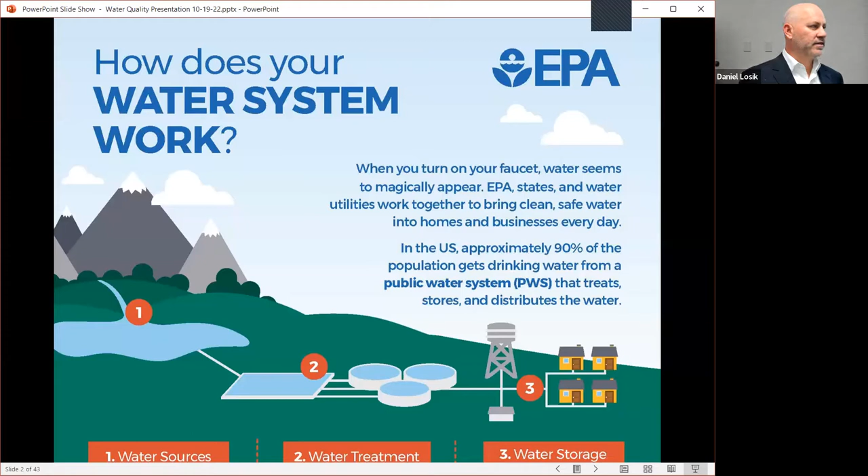This is a slide from the EPA describing water sources, treatment, and storage. Those are basically the three stages of getting water to a home, the final stage being the distribution system. You'll see on the slide that 90% of the population gets drinking water from a public water system. Throughout the country, wells only make up about 10% of the population's water supply.

So the water utility is responsible for providing safe drinking water to the community and making sure it meets the standards of the NJDEP and the EPA. That's what we're tasked with doing. Drinking water treatment isn't really meant to take out tastes or anything like that—it's meant to ensure it's safe to drink.

So the water utility, we have a distribution system of water mains, about 240 miles throughout the town, and 3 storage tanks, 2 of which are elevated, and that provides storage for us during times of drought or high demand, so we can meet the needs, as well as providing fire protection for any event that might happen. So we have to store the water

in these tanks to be able to supply the constant demand for residents. We also provide bulk sales to 3 other municipalities, that being Helmetta, Spotswood, and South River. Some of those are supplemental to those towns.

South River and Spotswood only supplement their supply with us, and Helmetta gets their water strictly from the township of East Brunswick. In 2021, we averaged 5.3 million gallons per day. That was our average for the year. We could peak up to as much as, say, 10 million per day in the summer. Of course, in the winter, it goes a little less.

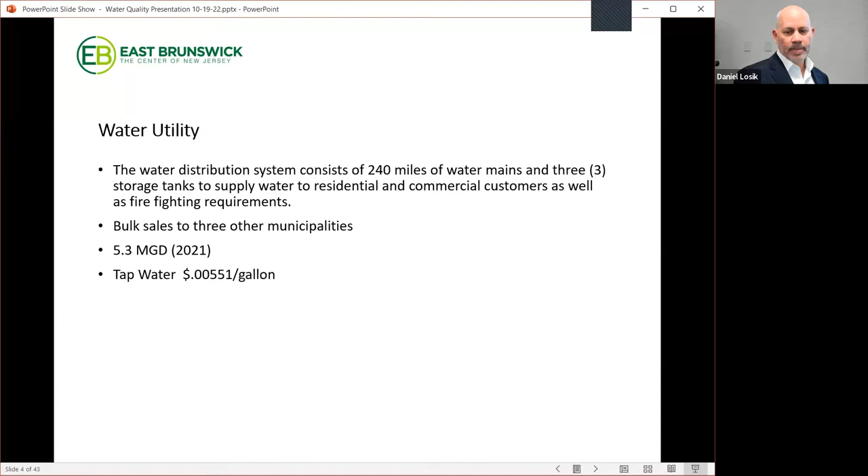All right, if you can see, that's just an overview of our distribution system. Let's see if I can do this. Up here is where we get our water from. Middlesex Water Company supplies the water down Ryders Lane to our pumping station on Tice's Lane, and then it gets distributed throughout the system. This is our Fern Road water tank, elevated tank, Summerhill Road one, which is near the mall, in the mall parking lot, and then our largest one is right behind our pumping station.

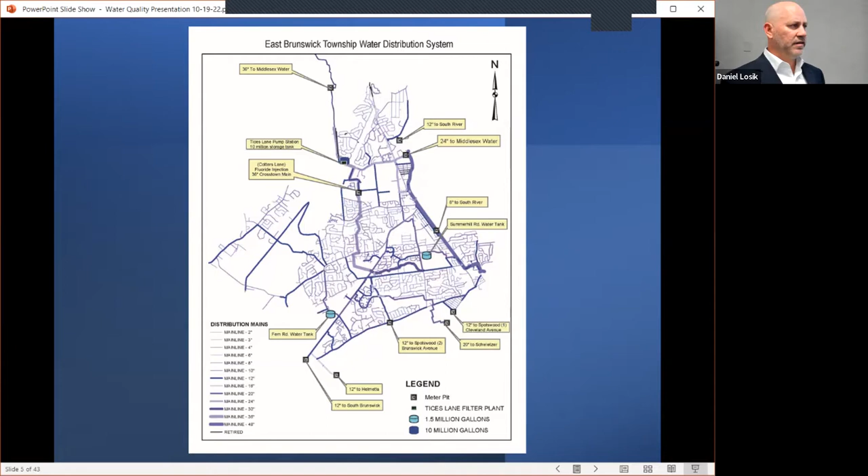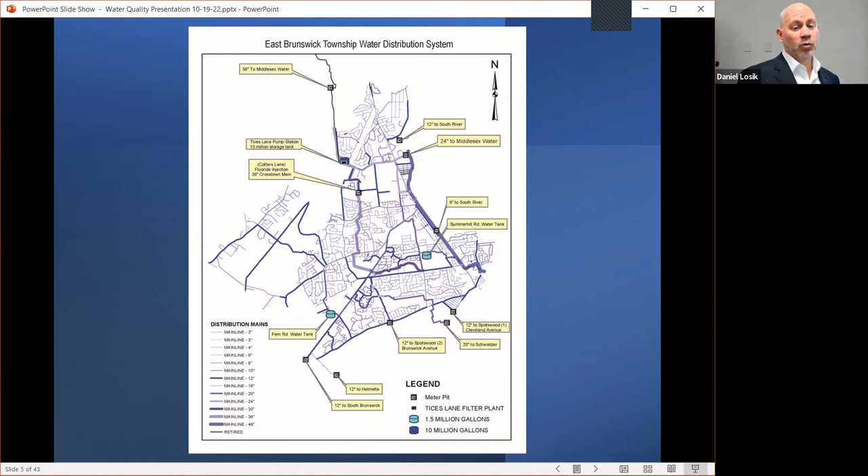This is where we supply water to Helmetta, Spotswood, and South River. And we also have interconnections with other towns in emergency situations where if our supply is compromised, like it was several years ago around the July 4th weekend, we need to get water from other areas. So we have interconnections with South Brunswick, Milltown, South River, Spotswood, and Helmetta.

And those are on the right-hand side there. You'll see our contracts for those bulk customers that we have of what we supply to them.

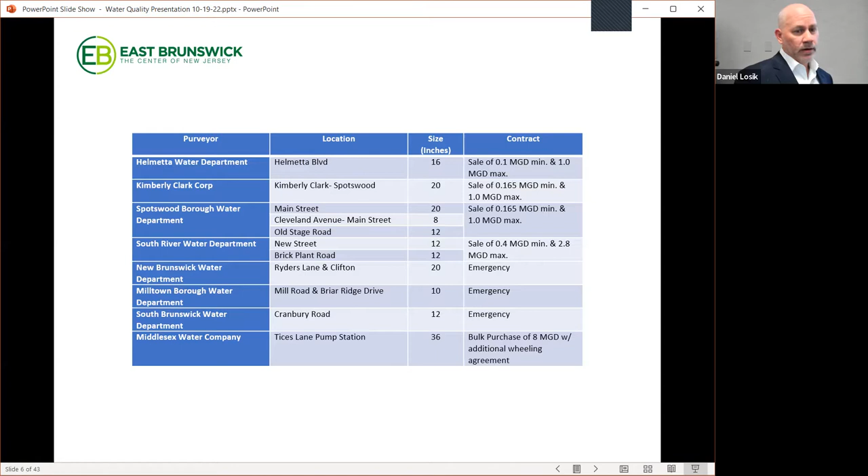Sure. What's the size in inches? What does that mean? Oh, that's the size of the supply line that goes to them. Yeah, that's the size of the main that goes to that particular customer or interconnection. Because I see the different sizes, so I was wondering, does the price we pay as a customer per gallon factor in the size, or would that factor into how much water we could receive or distribute to them? So it's just how much we can get or receive from them, that would just limit that. That'd be a limiting factor.

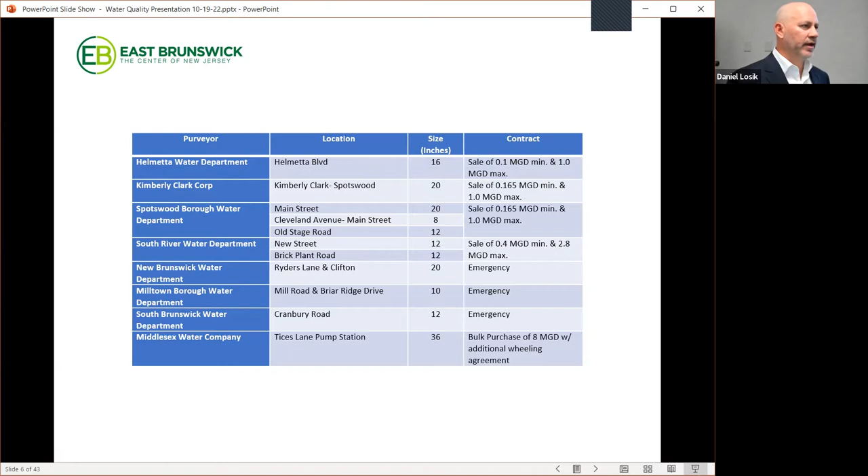Okay, so in 1974 the EPA adopted the Safe Drinking Water Act. It came up with primary standards for drinking water throughout the country, and it listed contaminants that it would like to see addressed. Before this, there were no standards, so we had to ensure that we had safe drinking water for the entire country. That's what the EPA came up with.

And all these came with health-based MCLGs, maximum contaminant level goals. So everything in that primary standard is based on a health standard to make sure it wasn't detrimental to someone's health. With that, they came up with maximum contaminant levels for each of those contaminants, so you can have up to a certain level but cannot exceed that. They also came up with secondary standards, which are voluntary. Those are not health-based; they're more to address taste or odor or things like that that may not affect health.

In 1996, there was an amendment to the Safe Drinking Water Act, which included trying to have source protection for the various sources of water, and we'll cover those in a moment. Along with that, there's something called a CCR report, the Consumer Confidence Report. Every year we submit a report available to the public to look at our testing, how we did, and any violations we may have had, and that is available on the township website at any time.

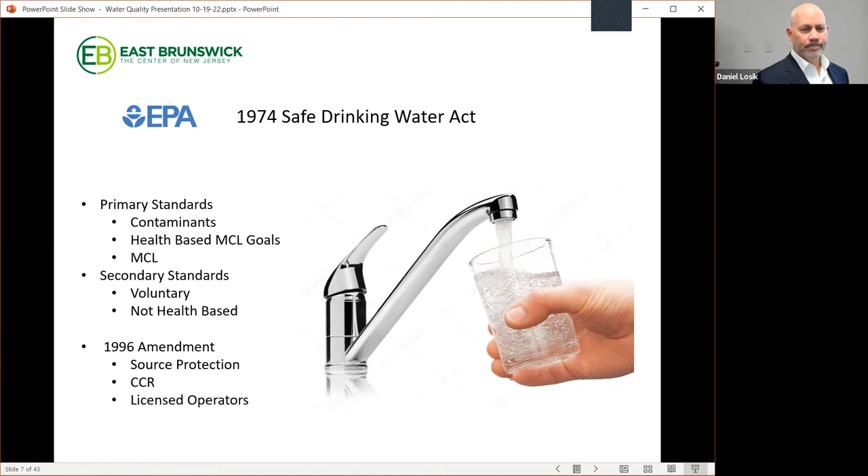What are the water sources? There's really two sources of water: groundwater and surface water. Groundwater would percolate through rock and other geology and settle below the earth, whereas surface water, just like it says, would be a river, lake, stream, things of that nature.

Of New Jersey's supply, 75% is surface water. I know back in the township we used to have a mixed supply of groundwater and surface water. In the early 1980s, from what I understand, the Farrington Aquifer, which we are part of, had saltwater intrusion. So they were limiting the amount of groundwater you could take out of the ground, and at that time the township decided to go to a surface water source, which we'll get into a little bit later.

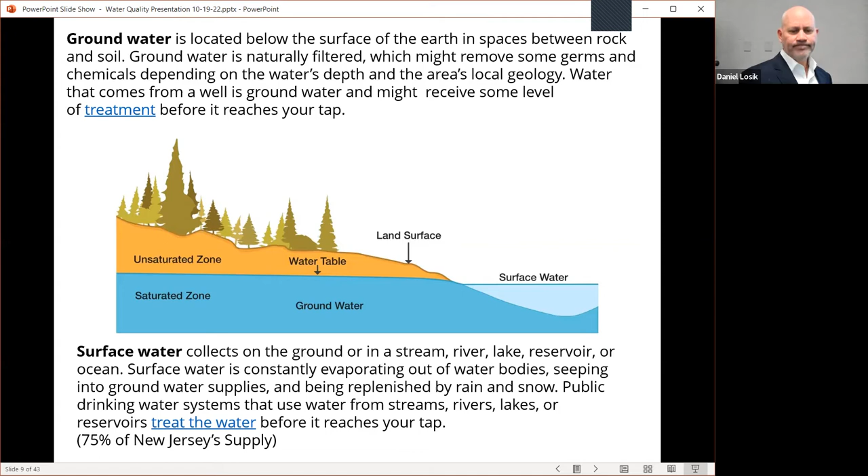So we just have surface water only now, there's no mixed supply anymore. The salination of the groundwater was a result of pumping? The influence of surrounding bodies of water.

So the township, back in about 1985, gets their water from the New Jersey Water Supply Authority, which is a state agency. It was created by the New Jersey Water Supply Management Act in 1981. That act ensured there was a safe, plentiful drinking supply.

So when I talked before about some other states in the western part of the country where their supply is limited, they thought about this a long time ago to go to a sustainable source of water, making sure we had a plentiful supply, especially in central Jersey. That's why it was created, like in California, Utah, all that area of the country.

So they acquire, finance, construct, and operate a large water supply system, which we'll get into in a second. Is that when you say authority, it's like a team, a group of people? Is that what it is? Yeah, the Water Supply Authority is a large group, a team of engineers, executives.

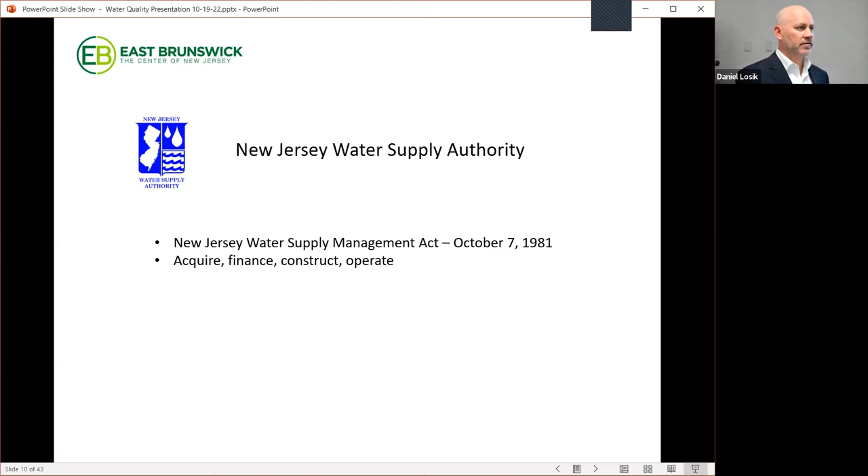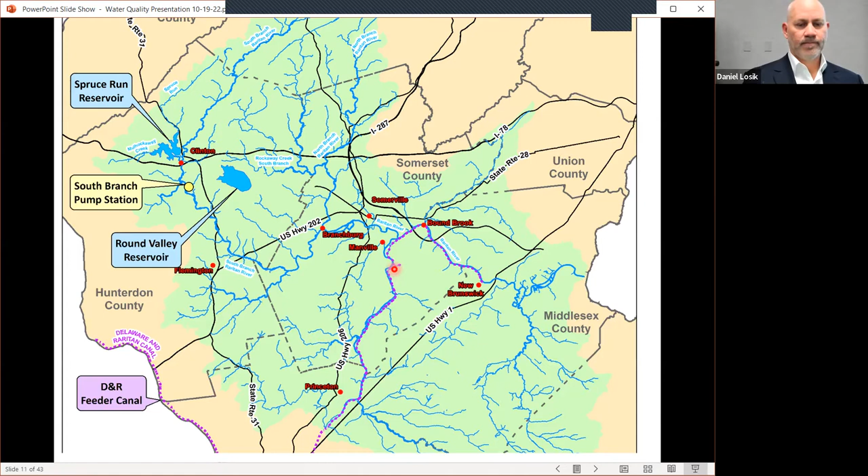They're stuck there in traffic, at 287, that's how I remember it. They make it nice to look at, though.

So the Delaware Raritan Canal was originally a barge canal used to take materials through the Pennsylvania Railroad Company. Afterwards, it was rehabilitated to become a public water supply, and the state took it over. Part of the Water Supply Authority's role is to make recreational paths between the Raritan River and the canal, so people can take advantage of that too.

So part of our commitment or payment to the Water Supply Authority is for recreational purposes as well. They created a recreational component to the Supply Authority, and they also maintain the canal and dredge it from time to time and treat it for different things.

So we get water from both canals? Or do we just get water from the Delaware Raritan Canal? It's one canal, although it has two names. That's also a river. Yes, so it's just the canal itself, the smaller portion, correct.

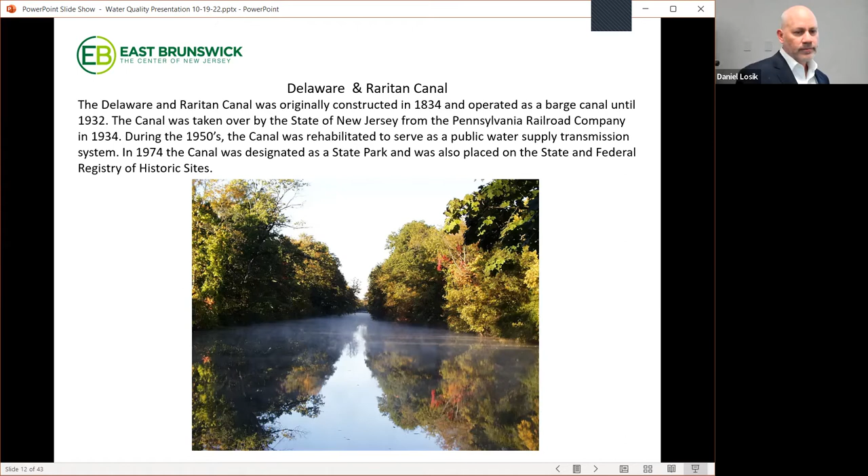So the Spruce Run Reservoir is an on-stream reservoir that holds 11 billion gallons. So we have lots of reserves. In times of drought, they can collect and keep that on hand to provide drinking water for us and for other people that might be taking their drinking water from that canal.

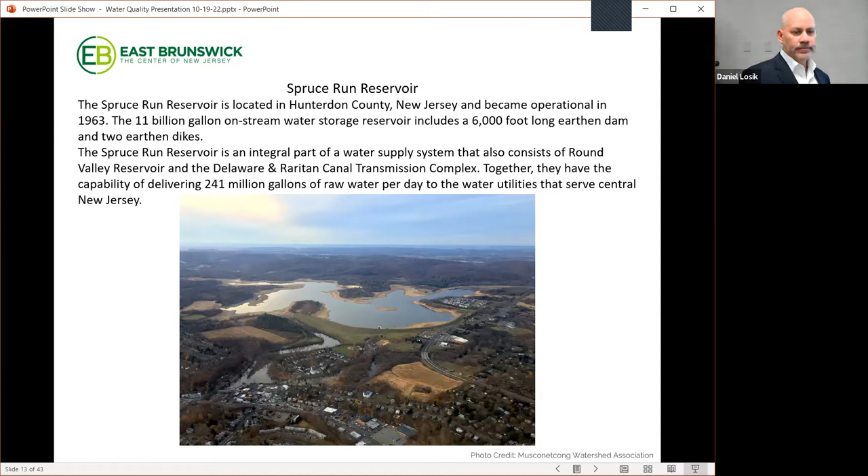And that is also connected into the Round Valley Reservoir. Between the two of them, you can get 241 million gallons of raw water per day to be treated. Here we're going to look at the Round Valley Reservoir, which was basically a geological formation, a horseshoe valley, which they filled in order to hold extra water.

So they took what was natural topography and converted it into something that would hold water and be beneficial to the rest of the state. That reservoir can hold 55 billion gallons of water. Both of these are maintained by the Water Supply Authority.

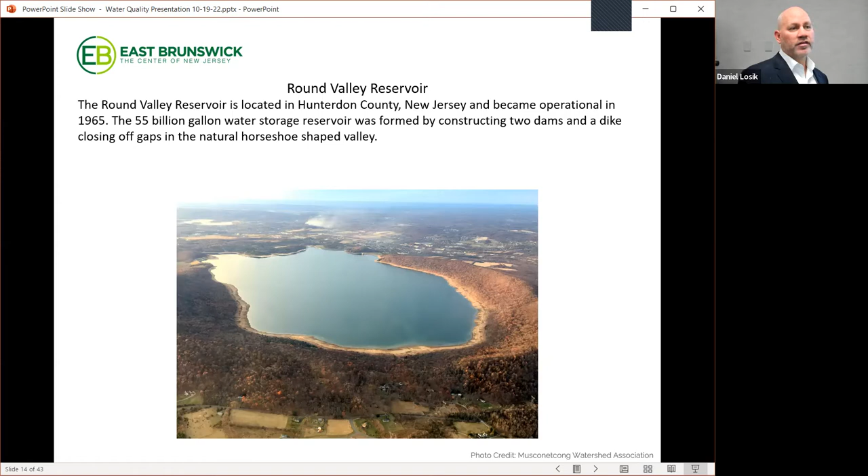And I'd like to share a little video here that they had on this, which I thought was pretty interesting on the reservoirs. Let's take a look.

We're going to be doing a reservoir structures refurbishment and resource preservation project for the Round Valley Reservoir that will enhance the stability and the safety features of the reservoir and ensure safe operations for many more years to come. Well, the reservoir was built in the early 60s. There was a bowl-shaped valley that had 3 gaps in it that needed to be filled to create the full circle that makes up the reservoir.

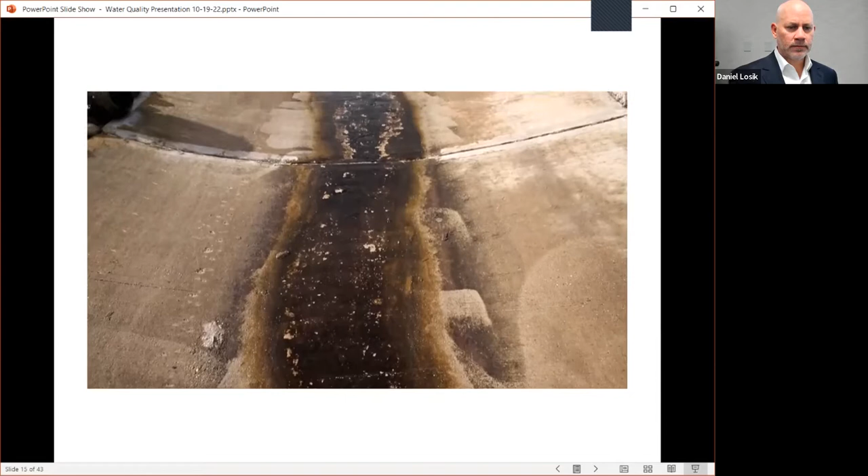We're standing at one of them. This is the Round Valley South Dam. At the bottom of every embankment, they put in drains, because the fact of the matter is these embankments are made of soil and they leak. When the reservoir was filled, they leak. All earthen embankments leak, but the engineers knew this at the time of design and installed features to deal with that leakage. The drains they installed were more permeable materials, such as sand or gravel or a mixture of those, placed strategically to capture the seepage that came through the impermeable core.

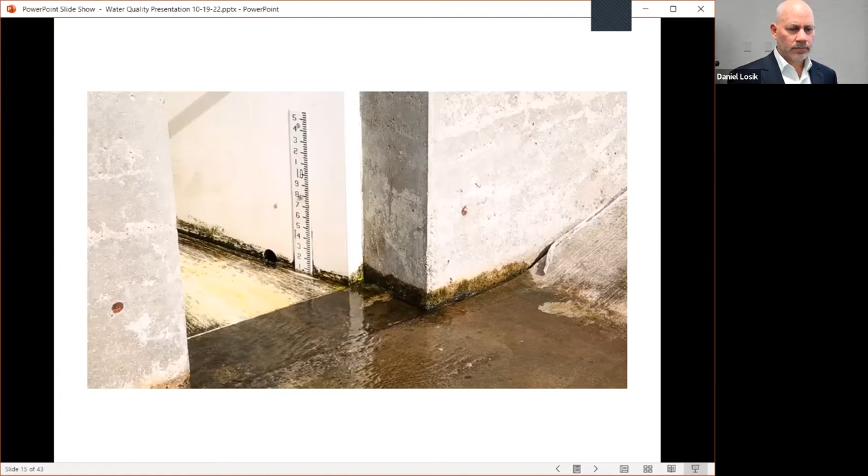The drains transport the water away from the dam in a safe manner. The seepage has been consistent since first fill, but it rises and falls in a predictable manner as the reservoir goes up and down. These seeps have always run clear, meaning it's not carrying the soils that make up the embankment. If they start running dirty or muddy, that would be a concern, because you're actually transporting the structure little by little away from the embankment.

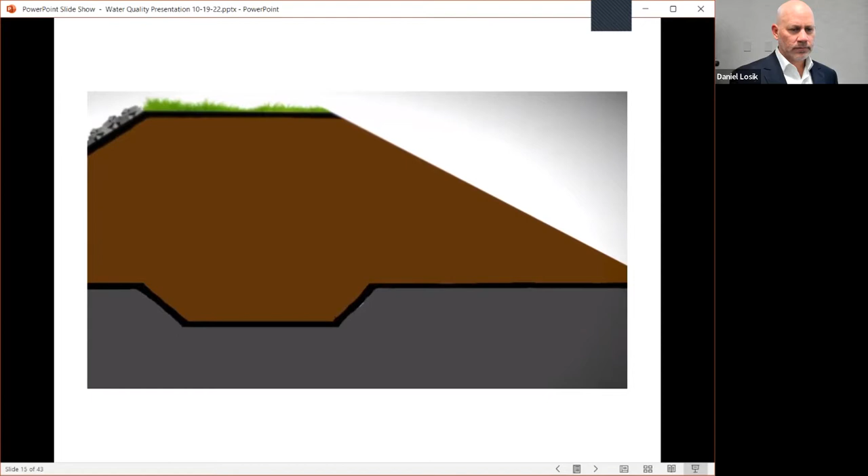The new technologies we have now will be used for the rehabilitation of this embankment. Most importantly, we'll be installing a new filtered drainage system on the embankment. That will entail basically peeling the top layer of the slope, then placing a sand drain. A full layer of sand will be placed over the entire downstream slope. Once the sand drain is placed, the topsoil will be replaced and the embankment will look much the same.

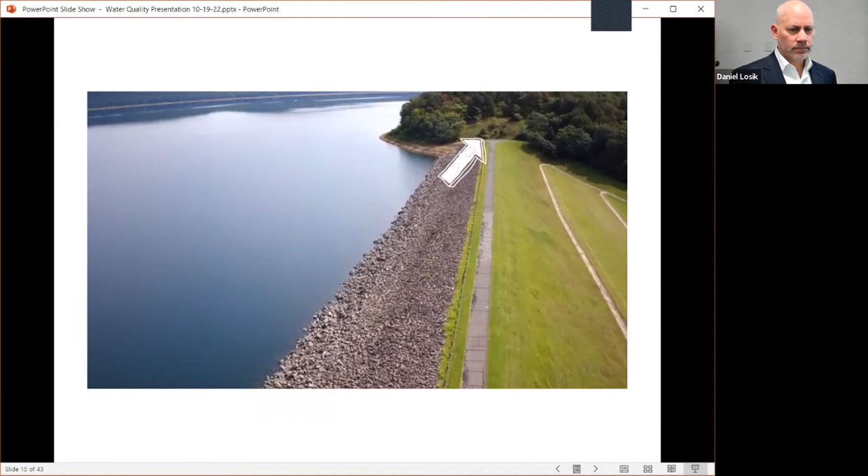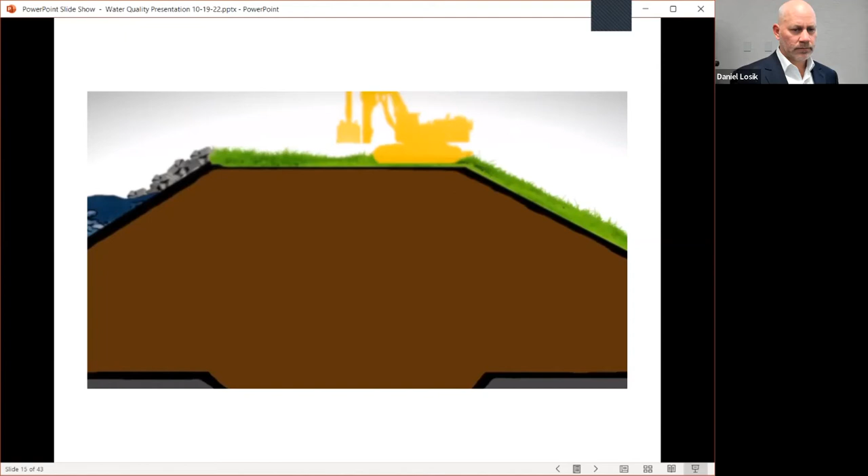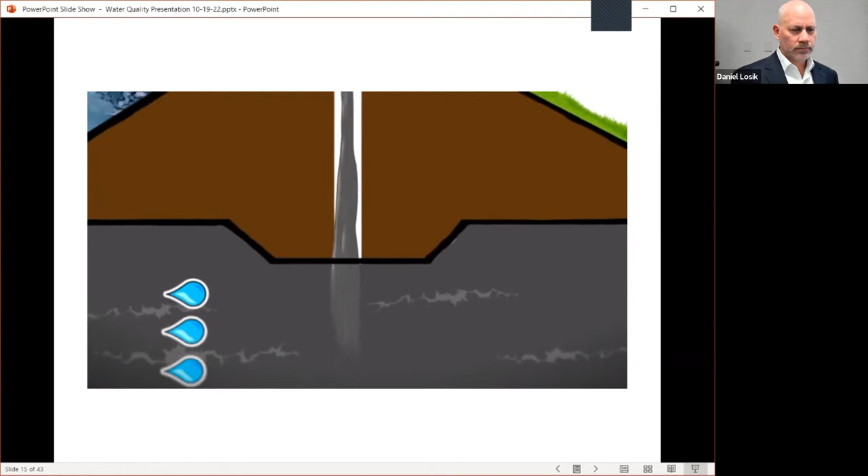Some of the other work we'll be doing involves grouting. The abutment to the embankment is where the existing valley meets the constructed structure. An area right at the abutments is somewhere we might be experiencing some of our seepage. What the public will see will be drill rigs up on the slopes, drilling through the soils and into the bedrock below, at which time they'll be pumping cementitious grout to fill the voids in the bedrock. The operating lifespan of such a structure is usually 50 to 100 years, and the work we're doing now is likely to extend it another 50 to 100 years.

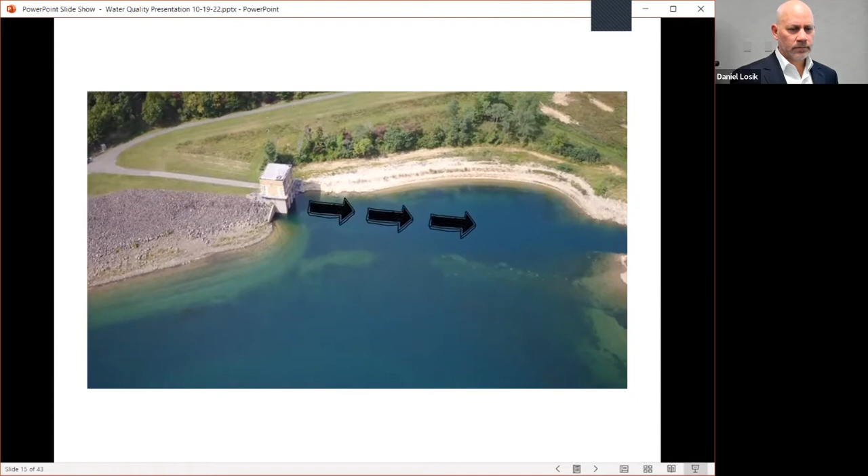Some of the other projects we'll be working on include dredging near the intake to the South Dam Tower. The South Dam Tower is where the pipeline comes into the reservoir. We pump water from our South Branch pumping station. While we're pumping, sediment in the river tends to settle out right there by the tower. When they originally constructed the reservoir, they had to excavate into the rock to create a channel where the water could get to the tower. Over the years, sediment from pumping has settled there directly adjacent to the channel. We'll be dredging that extra sediment out so we can have full use of our tower again.

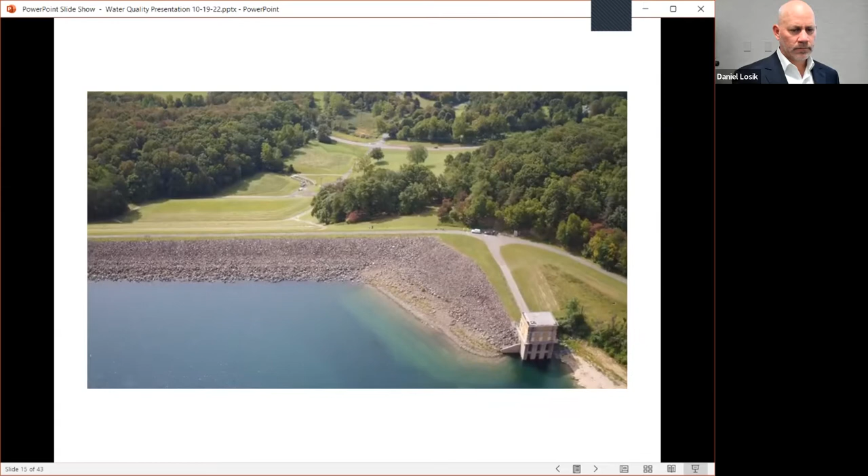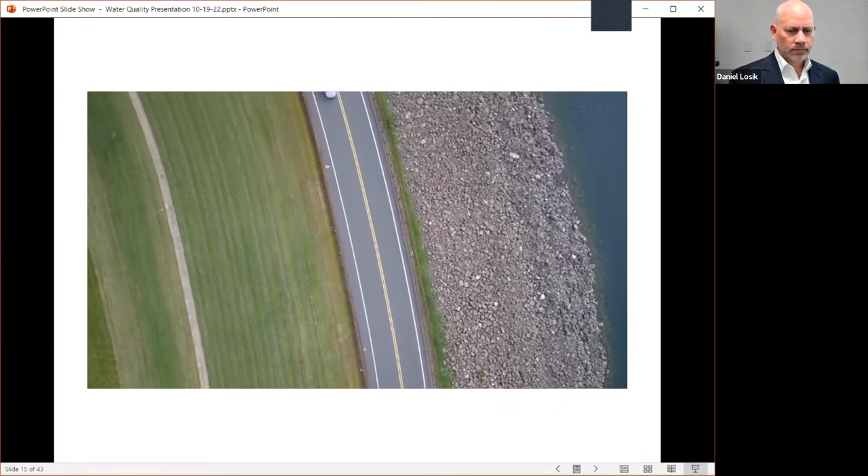There could be local road closures. It's likely that the road over Round Valley Reservoir, County Route 629, could be closed for a period during construction. There could be impacts to other local roads, but again, we're in the planning and design phase, and those impacts are still undetermined at this time.

Access to the boat ramp will be maintained throughout the project, even if the road is closed for parts of the construction. The authority will continue to work with Fish and Wildlife to help them maintain the boat ramp and make it accessible for the different reservoir pool elevations.

We have a great website, www.roundvalleyproject.com, and we'll be keeping the website updated as we have more plans developed for the project, timelines, and there's actually an email list that you can enroll on the website that will give you regular updates right to your inbox. We know that a lot of people love Round Valley and love coming here, and we want them to be able to continue to do that as long as during construction it's safe for everybody involved.

As we saw in the video, there's a significant amount of maintenance that has to be done to a reservoir like that — engineering, monitoring, and things like that — in order to maintain this supply for us. So it's not just an easy thing to provide the water in the quantities that we require.

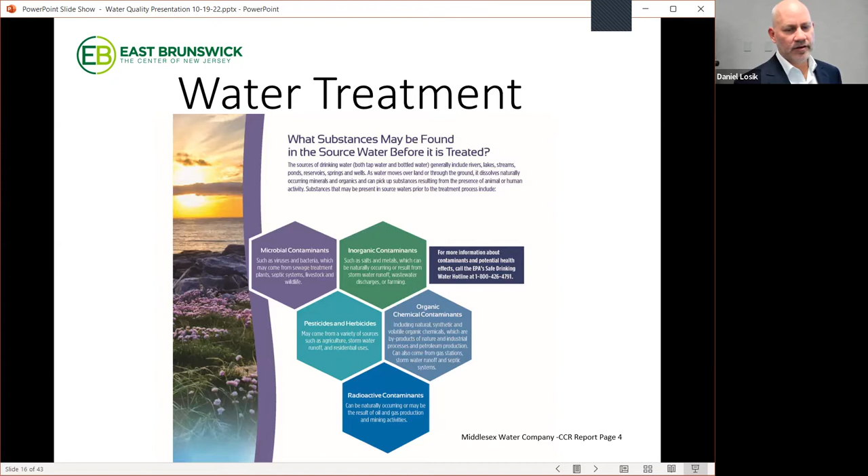So where does our water go from there? The Township does not treat any water ourselves. We have a contract with Middlesex Water Company, which has an intake and then treats the water for us. Part of the treatment, or part of the contaminants they might be treating for, is microbial contaminants, inorganics, potentially pesticides, herbicides, organic chemicals, or radioactive contaminants. Those are the potential substances that may be found in our source water.

So this is the plant that our water gets fed to, or gets pumped to — the Carl J. Olsen Water Treatment Plant at the Middlesex Water Company. And that construction you see there in the picture, I'll get into in a moment. That was a $50 million improvement to the treatment system that they installed recently.

When we got the contract with the Water Supply Authority, we worked it out where they would treat it for us, so they only provide treatment for us. So we have some benefits for buying in bulk. We buy our water in bulk from the Supply Authority and then have it treated by Middlesex Water. So there's some benefits to that, and that's how we purchase and treat our water.

So when you say we purchase, that goes out of the municipal budget, right? The water utility, yes. So we buy the bulk — they call it raw water — from the Supply Authority, and then we buy the finished water from Middlesex, which is we just pay for the treatment of it.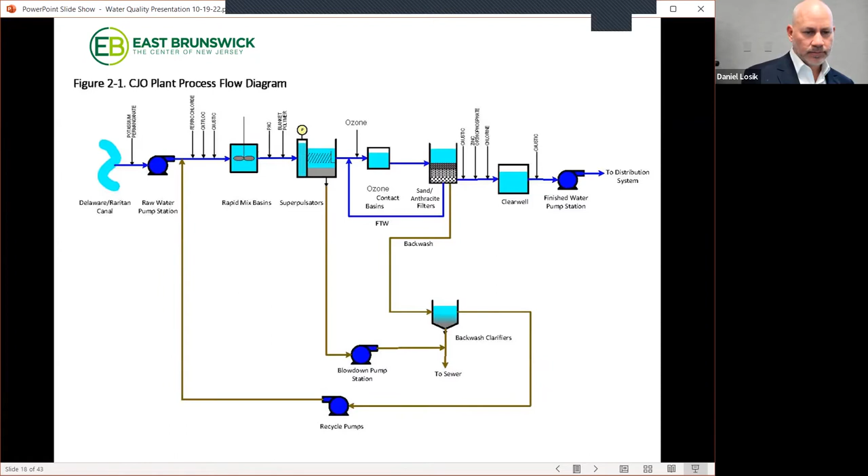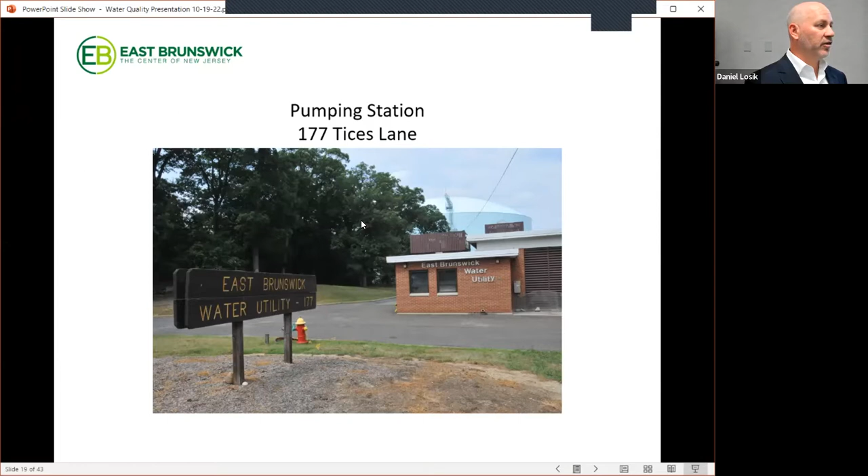So at the pumping station, we have a water system operator, so that's a 24/7, 365 operation. We have people there all the time to monitor our system, and the operators are state approved to sample water. They use our certified equipment, and we make sure that's calibrated on the frequencies that are recommended, and within the limits of the manufacturer specifications for tolerances to measure what we're actually measuring.

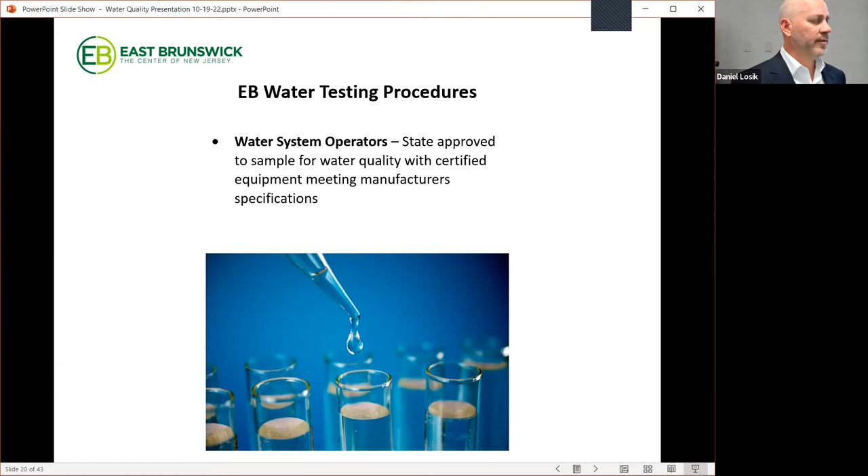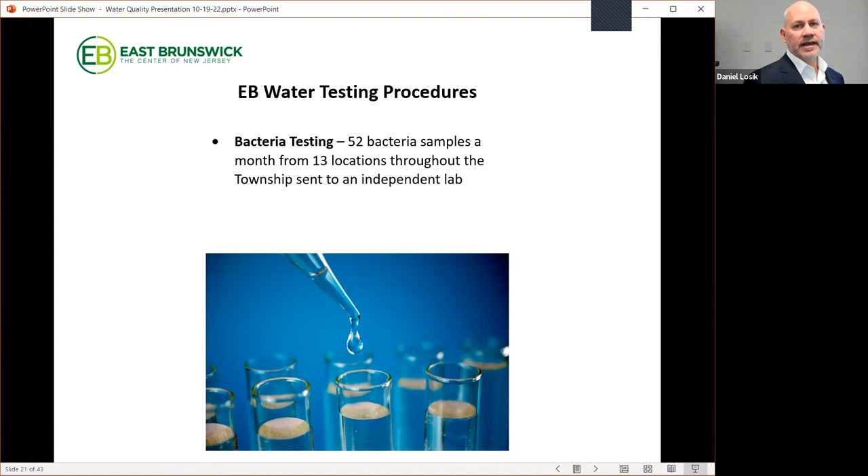So we perform bacteria samples every week. We do 13 bacteria samples in the system, and I'll show you in a minute where those are, for a total of 52 that we must submit to DEP. Those are then sent to an independent lab. We don't know the results of the test, so there's no way we can change anything. We take the samples, and they come and collect them.

So it might be a little hard to see, but this is the sites we take our samples at. You'll see a bunch of these ones, Rutgers Gardens, on the extremities of the system. That's where you're going to have the most dilution of any kind of chlorine, or potential of water that's been in the system for a long time, since it has to work its way to the outside. It's kind of like your fingers and your toes, and our pumping station would be your heart. So these are the extremities where you're most likely to have any kind of issues in terms of water quality, because of the time it's been sitting in the system.

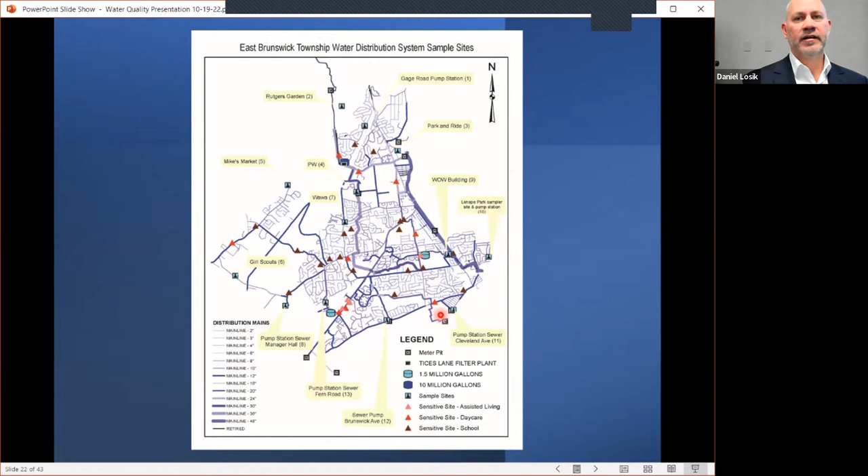If there were an issue with bacteria found by the state, would they notify you? Yes, we would get notified, and then you'd most likely get a boil water alert, which hopefully you haven't heard of before. We would have to issue that. The state would immediately notify us of our deficiencies. We'd use whatever we had to for that, we use everything at our disposal to get that out.

We have water quality parameters we have to adhere to as well. There's 10 sites per quarter we have to test for certain things, like the orthophosphate we discussed a little bit earlier, and alkalinity and pH. So those are part of our quality parameters that we have to do.

There's a question on the chat asking how the township is preparing the contractor to treat our drinking water for emerging contaminants such as PFAS and PFOA. Yeah, we'll get to that. And then I see another question about the aquifer under Edgeboro Landfill. I do not know about that. I don't think any towns use that. We certainly do not.

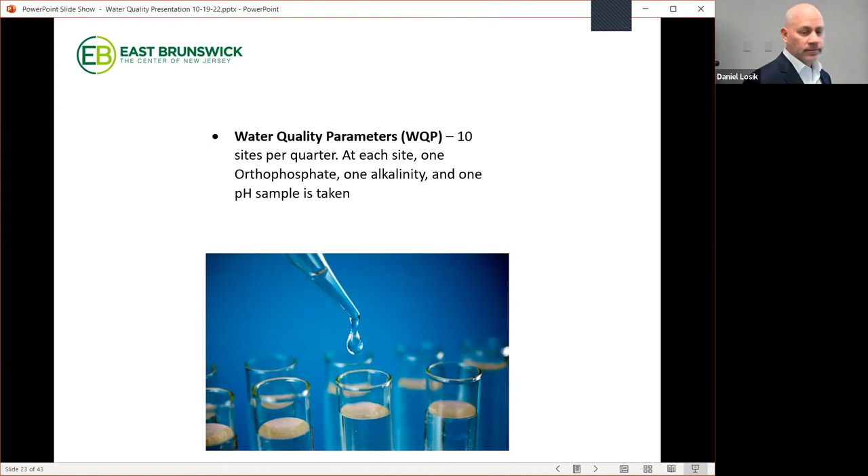At the entry point to the distribution system, we're required to biweekly take an orthophosphate and a pH sample there, and that is taken by the lab. Our certified lab comes and takes those samples at our pumping station at the entry point to our distribution system.

Is our water supply being monitored as others are for signs of certain viruses like COVID and polio? We've been hearing stories that these viruses have been found, but that's actually more in sewage, wastewater effluent. That has nothing to do with drinking water, no.

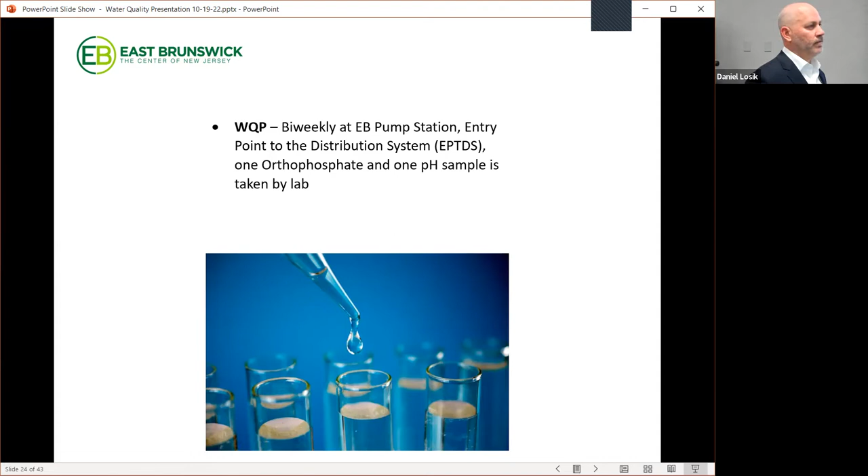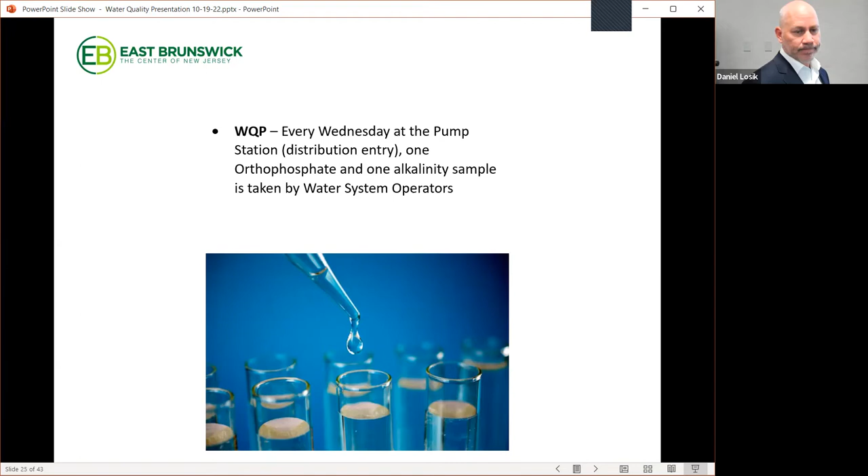Every Wednesday, we take our own sample of orthophosphate and alkalinity ourselves to double check what is taken by the lab, so we can keep up on everything. Daily, we test chlorine, fluoride, pH, and water temperature 3 times a day. Those numbers are constant, we're doing those constantly.

Arsenic? That would probably be from Middlesex Water on their tests, or I'd have to check on what the tests are from the lab. I don't know that offhand, but I can get that answer for you. I apologize for not having the answer right now.

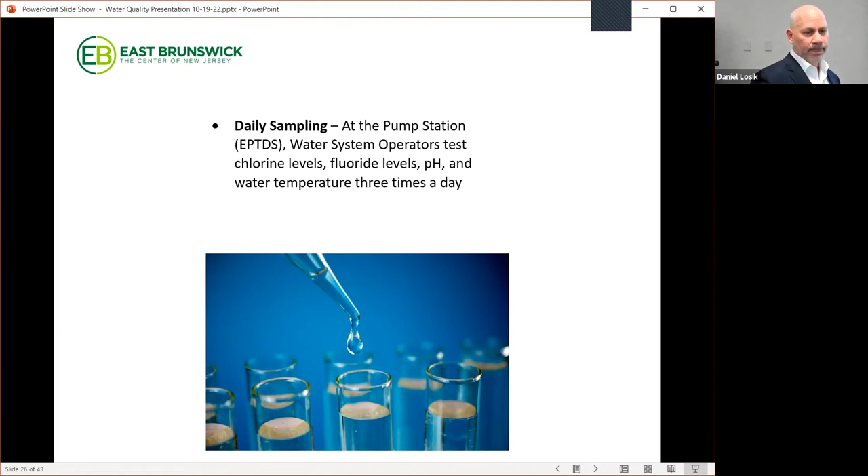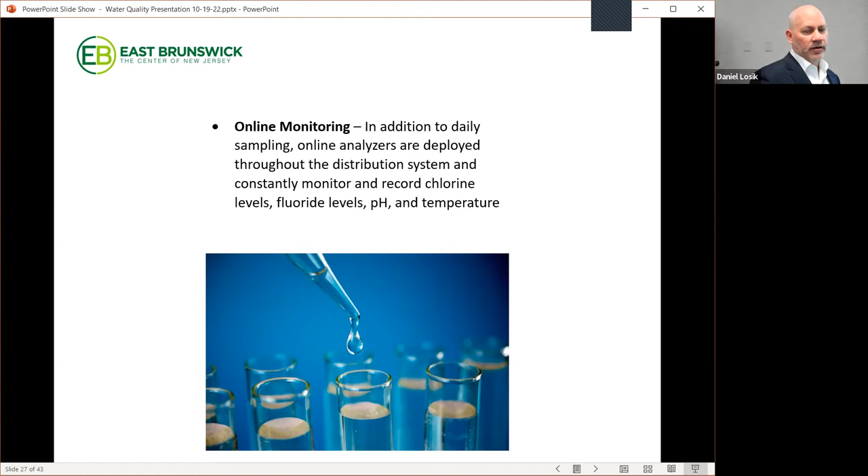We also monitor using analyzers that we have for chlorine residual, how much chlorine is left in the system at certain points of the distribution system at the extremities, to make sure it's safe and at a certain level, along with our fluoride, pH, and temperature.

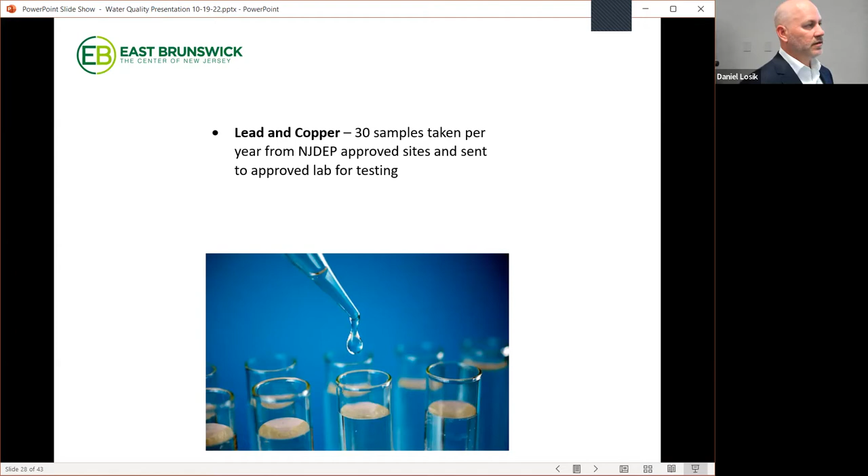Lead and copper, we have 30 samples taken per year at approved sites that we have to send into DEP to get tested. And then iron and manganese is tested once per year by our lab as well.

These are the disinfection byproducts that Middlesex is trying to eliminate or reduce by having the ozone system. Trihalomethanes are some of the byproducts of chlorine generation if it's too much of a concentration, and we're tested quarterly for those at 4 locations throughout their system, as well as HAA5s.

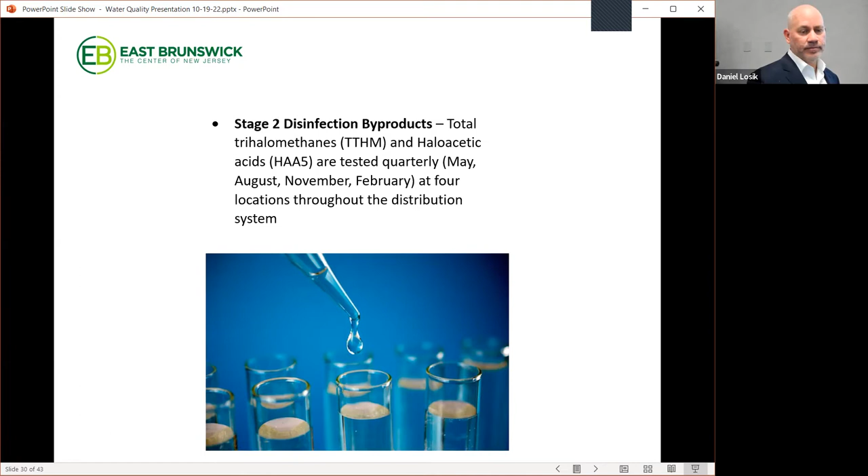This was one of the questions we had online about some emerging contaminants or emerging issues that are happening. We're tested 1 time per year at a designated location for that. New Jersey was the first state to set a standard for these contaminants. They're really derived from firefighting foam, and from what I understand, also a breakdown of Teflon. So these things are getting into groundwater and surface water, becoming more of an issue at certain concentrations.

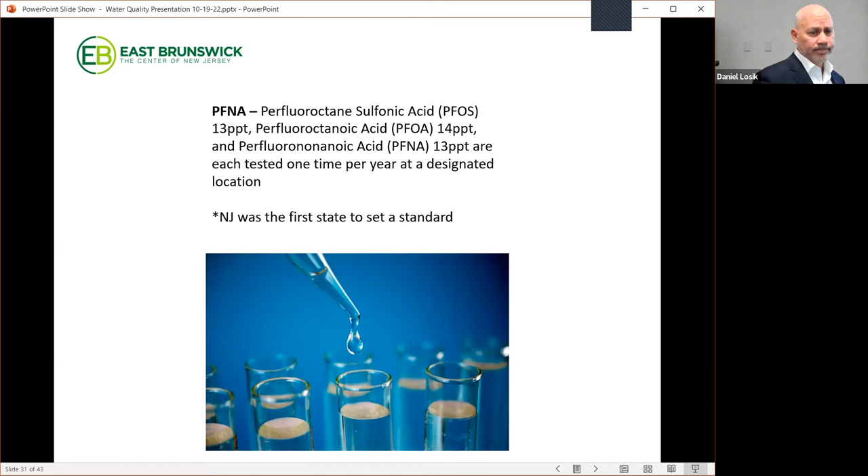Every so often we have UCMRs, which are unregulated contaminants, which we monitor for through EPA. The next phase, the 5th phase of that, will be taking place next year in January.

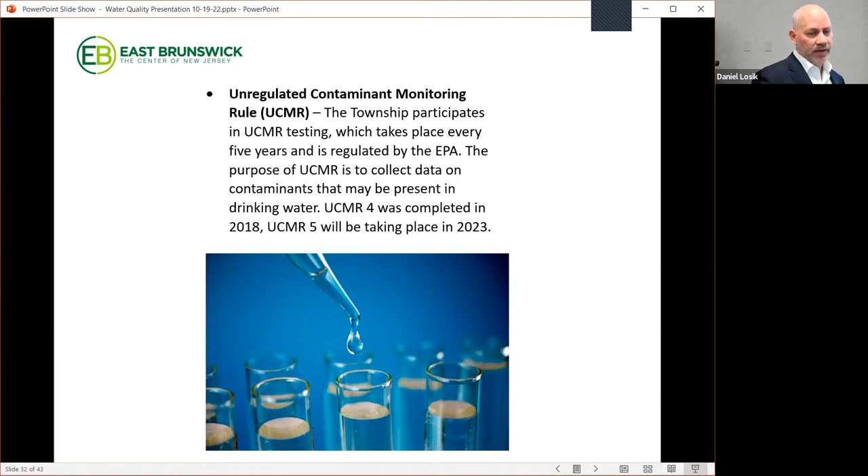The township had decided back, I guess in the 60s - I wasn't around then - that we would fluoridate the water. We have to maintain a level of 0.7 parts per million for fluoride, and that helps prevent tooth decay and strengthen enamel, basically for younger children. We're one of the few towns that do it, not everyone does, but that's the only thing we technically treat for - it's the only thing we add to the water ourselves.

Kevin might know, a previous mayor had ended the fluoride treatment. No, it's been discussed, but it has not been taken out of the water. Yes, it's been continuous since, from what I understand, the 60s. What are people's concerns with fluoride?

I don't want to speak for anyone, but some of the comments I remember are that some people have differences of opinions. There are differences of opinions from different organizations, academia, things like that. It's really an opinion type thing, which I have none of.

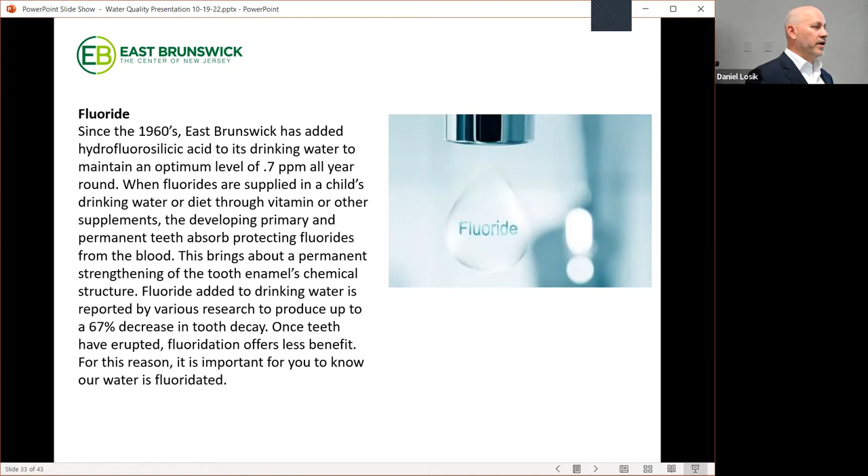There's something passed by the NJDEP called the Water Quality Accountability Act, which made some requirements for water systems. We have to replace our water mains in a certain cycle, every 150 years. As far as I know, we don't have any mains that old yet.

We also have to provide cybersecurity for our SCADA system, which monitors our tank levels, our pumps, and chlorine monitors, to prevent any kind of breaches where someone could take over anything. We were also required to exercise valves to make sure they work, so we can shut off the water at different locations to control it.

At certain intervals, we have to make sure those valves work. And then we are required to test every hydrant at least once a year. That's good practice too, in case of a fire, to make sure there's adequate fire protection for residents and commercial entities.

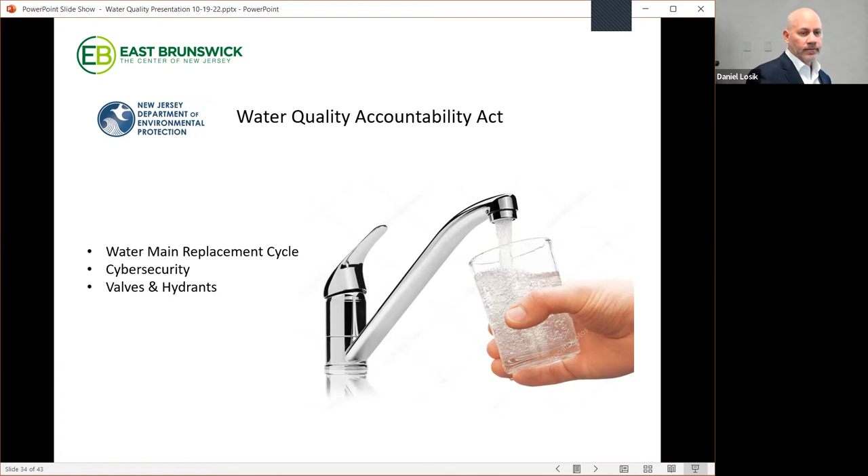Should we be concerned if we live in an older neighborhood or an older house? That's one of my main concerns. In what respect — the water mains, the pipes coming into the house? The only thing might be the composition or material of the service line potentially, but in terms of the main itself, no, flow or anything like that, no.

And the pipes that come into my 200-year-old house — should I be concerned about that? I mean, that's a township thing. Well, the utility is responsible up to what they call the curb box, which is a shut-off near the roadway, not quite the right of way sometimes, and the rest is really the property owner's responsibility from there into the home.

I do know, as part of the water meter replacement program, we're doing a survey to get all of the materials that go into the home, so we have a good inventory of what's out there. Then we could advise or come up with steps to notify on certain things that could potentially be a problem. That was one of the drivers to do a replacement program — to have entry into a home, and while we were there, change the meters out, and fill out an inventory survey of what size and material they are, so we know what's in our system and can report that to DEP.

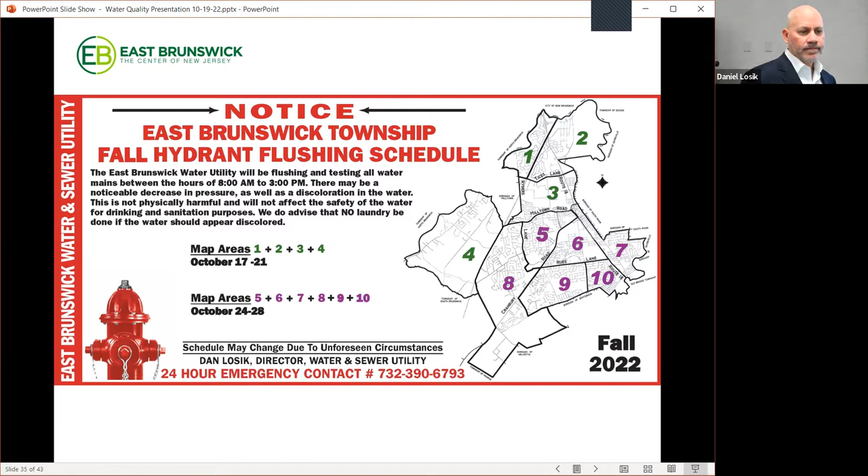In 1982, when we were deciding whether to be a groundwater source township, go to surface water, or go for a combo, they created a Water Policy Advisory Board to help set policy for the future of East Brunswick and determine where their source of water would be. The surface water option won out. We do have a member here of the Water Policy Advisory Board—thank you for attending. We go over lab reports; we meet every other month and submit lab reports to the advisory board, and they review our lab reports as well as any customer complaints. We also discuss future projects and the water utility as a whole.

There was a survey conducted by the Sustainability Task Force for this event here tonight, so I broke down the results of the survey.

The question was, do you drink bottled water, tap water, or both? It seems 45% drink tap water, 15% drink bottled water exclusively, and about 40% drink both. So the sample size of people who drink exclusively bottled water is pretty limited. I assume this was part of the 'reducing plastics one bottle at a time' presentation that was done in July—if you get a chance, please look at it, it was very informative.

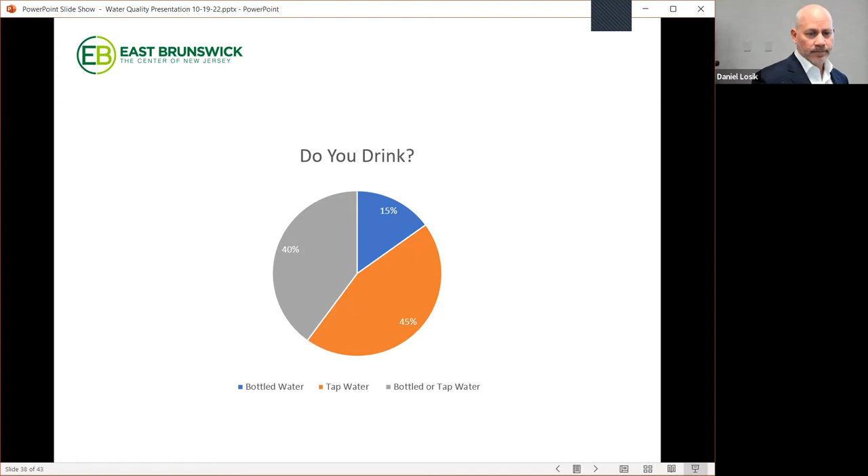Do you use filtered tap water? A majority of people have a refrigerator-style filter, it seems—looks like 47%. Other people opt for a pitcher filter. In terms of the sample, if someone answered both, I deemed it as refrigerator, just to be upfront about how I dealt with double answers.

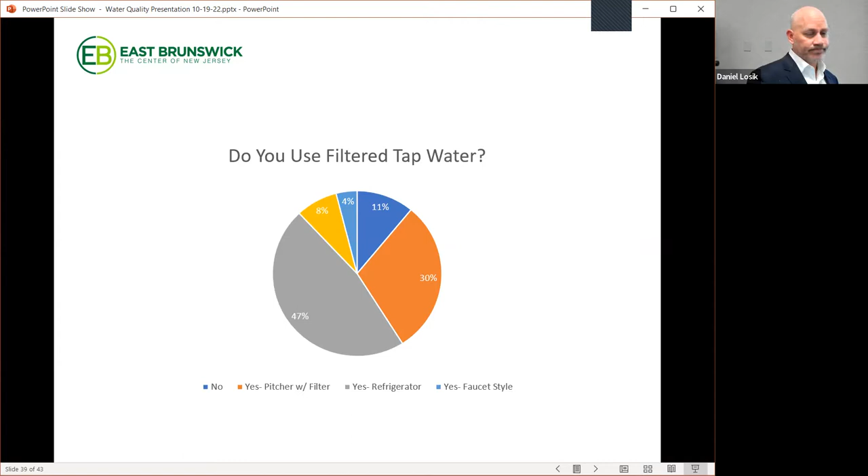Looking over the survey comments on why people chose bottled, tap, or filtered water, most responses tend to deal with taste. The taste of water varies depending on the source—surface water might have components of organic material in it because it's a surface water source. Like I said in the beginning, the water is safe to drink, and that's the requirement we have. It's not intended to be tasty, we'll say.

So for the acquired tastes of people, you can use filters to remove some of those things if you choose. If you don't like the taste of tap water and prefer a different taste than you're getting from the tap, there's an independent organization called NSF. Let me click on this to show you—let's see if we can get that up.